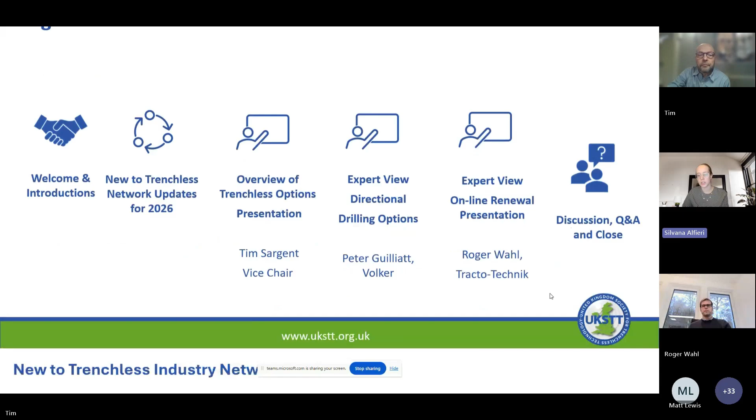I'm not sure if this is anyone's first New to Trenchless experience, but if you came to any events in 2025, you saw we were pretty busy. We had 5 online webinars like this one in 2025, covering an introduction to the network, new installation, rehab, investigation and assessment, and the benefits of trenchless. We had those throughout the year with great experts and engagement.

Another aspect of what we did in 2025, and will continue in 2026, was in-person events, often tied in with a No-Dig roadshow or other UKSTT event. There was a visit to Wessex Water to learn about some of their programs, a visit with No-Dig Live in Sheffield to Pipebots and the University of Sheffield to learn about the underground infrastructure facility there, and at the annual conference and No-Dig roadshows we had more in-person networking. Thank you if you came to any in-person events, it was great to meet people in person and online.

We had over 125 participants in our events last year from over 70 different organizations across the trenchless space, which was really exciting to see. We did a bit of a survey to see what was working and what wasn't, and got some really good feedback on these sessions.

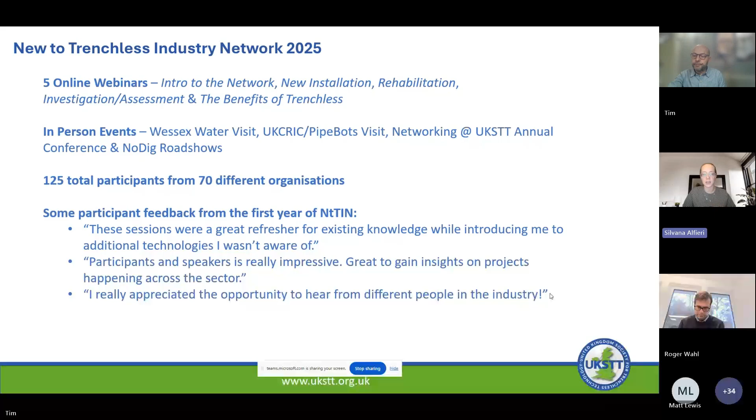Hopefully we can continue some of that exciting work that we did in 2025 into 2026. On the next slide is what we've got planned for 2026. There's a lot on here, but some of it is directly related to the network. Others are associated events, but we're going to shout it all out anyways.

This is the first of the online webinars, and we are planning 4 more throughout the year. You probably already have the dates, but if not, a reminder. On March 26th, we'll be on rehabilitation with a focus on non-CIPP methods, because the one we did last year was more focused on CIPP. On May 14th, we're doing site investigation and condition assessment. July 16th will be focused on infiltration, and November 19th will be rehabilitation with a focus on CIPP.

Those will all be at this time slot, 2 to 4 on Teams, and we'll circulate the meeting links beforehand. It'll be a similar structure to this one - an overview and then expert presentations on their experiences with those technologies.

Some other associated events, which will be great if you're looking to learn more about trenchless and how we interact with other industries, are these 3 associated events. On January 28th, there's an IWA ISTT webinar on an introduction to trenchless, so that will be a bit of a collaboration. I believe if you'd like that link, you can contact admin at UKSTT. I don't know what time that will be at, apologies, but that will be a good webinar.

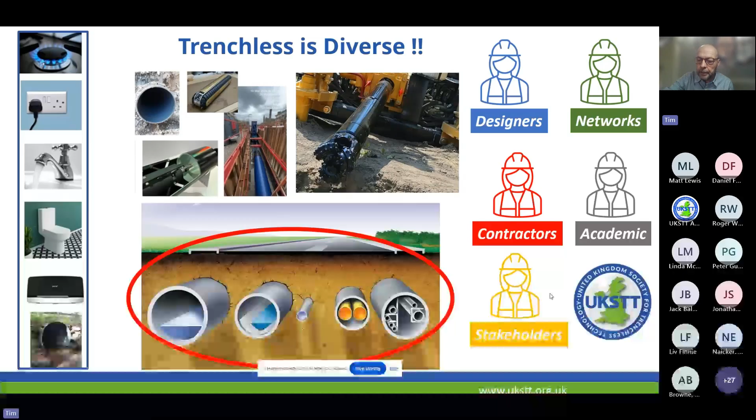We need to recognise as a community the diverse range of people involved, whether on the design side, the owners of the networks, the contractors, specialists, even academics now with the brilliant work going on using AI, and stakeholders such as highway authorities and the Environment Agency and other agencies, wherever you are in the world, who have an influence but may not be the paymasters. We can learn from each other, from other sectors, and the whole industry as a whole.

Next, why bother? Traditionally trenchless came from a background of not digging the road up. That's still valid, and we continue to reduce reinstatement and excavations in the road, but there are other huge benefits. One is time. Some programs are quite significant, and the productivity these techniques offer the industry exceeds anything you could achieve with a traditional trenching operation.

In my early days I did a lot of directional drilling projects, and I would invite clients, when it was all new and exciting, to come visit the job, and warn them to come early. Some wouldn't take that advice and came late in the day, by which time the project was already completed. So productivity is an area to look at.

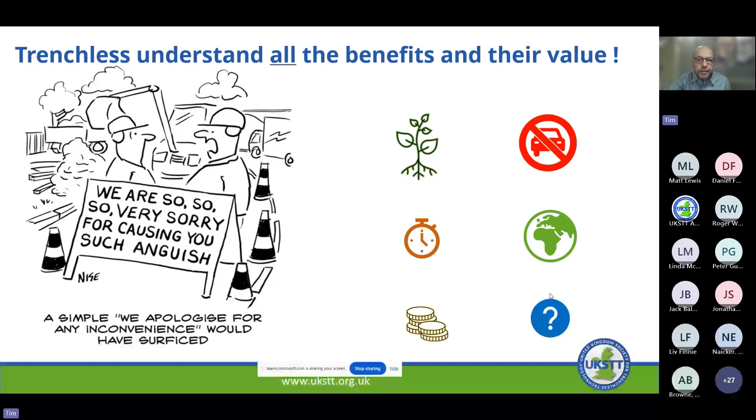The other thing to look at is programs. Projects undertaken by trenching can take significant time overall. With trenchless there may still be disruption because of access, stringing out pipe and other things. However, a program in London that was going to take 3 years was cut down to 9 months by using trenchless. Just a small point, but something we like to raise and educate people about.

The other thing I want to mention is: is it innovation, or is it business as usual? We have this dilemma where we talk about things being innovative and then frighten people away. I don't know how many on this call are really new to trenchless, but often by calling it innovative we scare people because they don't want to be the first to use it. Most of the technology I'm going to show you has been around for 40 years plus.

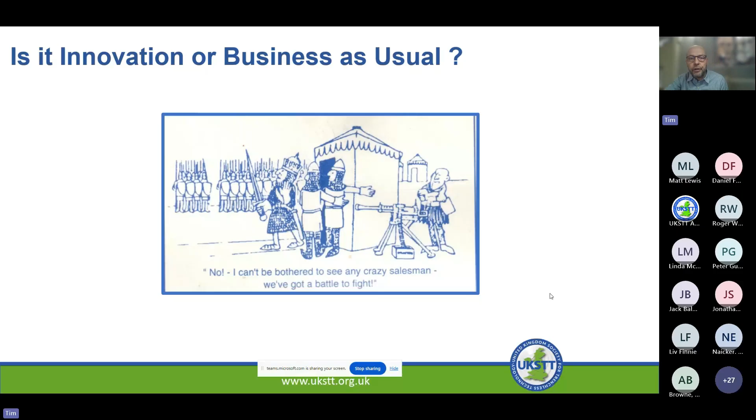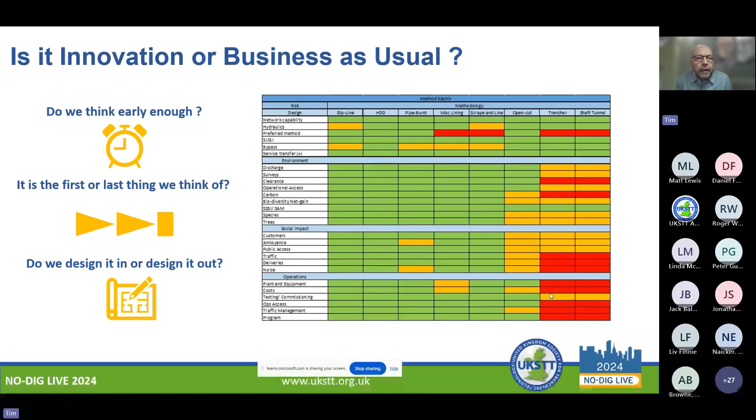So don't be too scared, it's about knowing which technique is appropriate and which process offers the best outcome. We often hear: we would have loved to use it, but it was too late, we'd already committed. We'd encourage you to think about it from the very first moment and engage really early. This crib sheet I've borrowed from Severn Trent Water encourages their design engineers to consider all these things before even thinking of putting a trench down the road or through a field. Thinking early and engaging early is really important.

This slide scares me. This is a project I was doing in 1990, and I have to pinch myself, that was 36 years ago. This was the M40 motorway in the UK, which hadn't been used yet. They'd built it and left out quite a lot of communication ducts, which wasn't helpful. So we went and installed those ducts by trenchless, while the tarmac was still very green and had never been used.

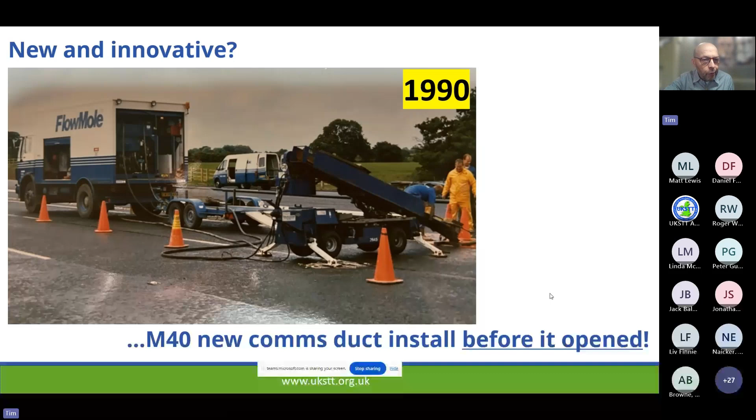So I'm going to run through a snapshot of different techniques, whistling through those now to give you a flavour. Some of which you guys will be even more familiar with than me, I'm sure.

But my job is really to inform you and educate you about the options. One health warning, particularly with new installations, is absolutely critical.

Going back to my first point, it's well worth noting ground conditions. Ground conditions can be a huge challenge if you haven't got the data. It's not that you can't use these techniques I'm going to go through, but knowing what the ground is can determine the type of technique you might adopt, and indeed the equipment, the tooling, or the cutting heads you might use to install the assets. So spending time understanding ground conditions is really important, and it will pay an absolute dividend.

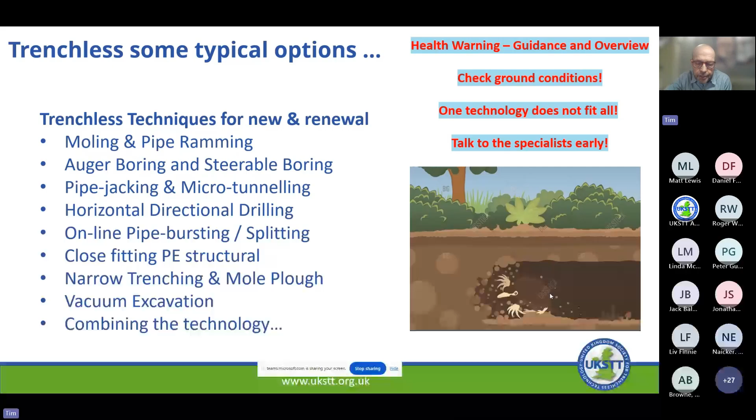Where we have failings in the industry, it's often down to lack of information and knowledge. But that data is really invaluable, so I'd call out to you guys to consider that on your projects. The cost of getting that information is minute compared with the huge benefits you'll gain by having it to hand.

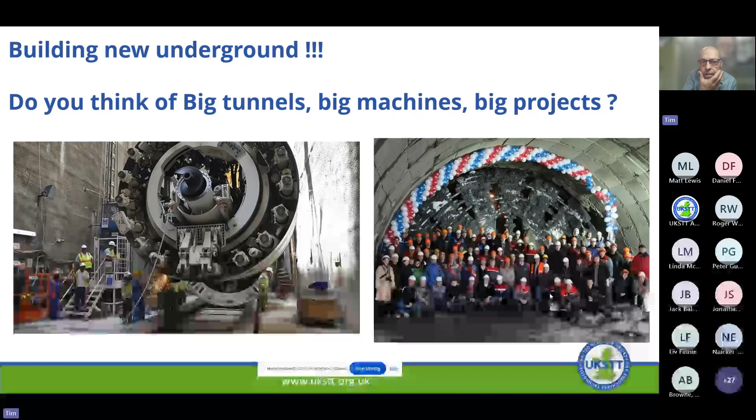So now I'll go into some details. Often when we think about building stuff underground, I'm a civil engineer by trade, and I think of these things as often defaulting to the mega projects - big tunnels, big machines, big projects. That's probably why people don't adopt trenchless on occasion, because that's what they're thinking.

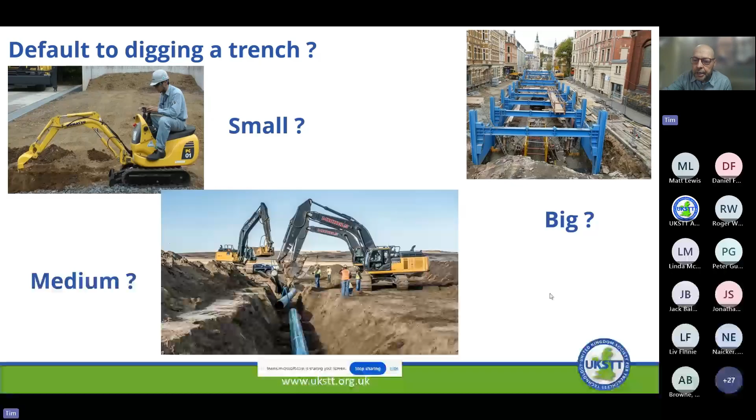So I'll touch on each one of these briefly. Starting small - moling. I know Roger's on the line from Tracto, but whether it was Russian or German invention, this goes back many years, I think 50 or 60 years ago. It's the most simple technique for moling underneath the ground.

Ironically, when we talk to people, we still see people cutting trenches across roads, whether it be a small road on a golf course or a major highway, for quite small pipes, and it really isn't needed. So moling is your simplest way of avoiding digging that trench. Roger and Tracto could bore you to death with that history, but it's important to recognize that even on the smallest diameter, on shorter lengths, you can use this technology.

What I'd ask people to do in the chat is, at the end of each one of these, if you've got any questions about the tech, drop a note in there. So that's the starting point.

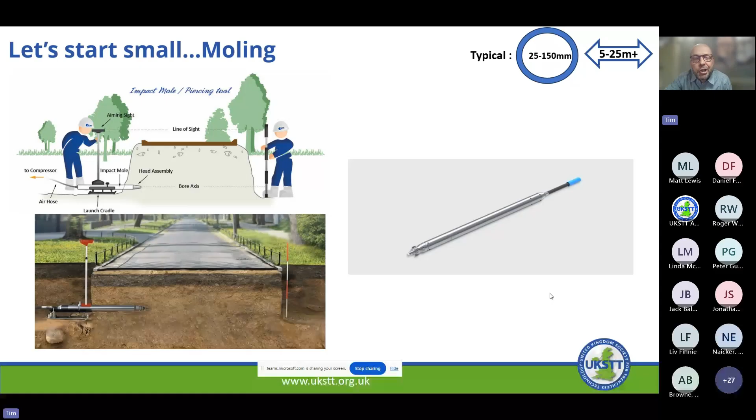Then using a similar process with a percussive hammer type technology, we can step up. Often people have forgotten about pipe ramming as a very simple process to install a crossing without digging a trench. These systems can cope with a very large range of diameters. Why bother doing this? Well, if you've got the space, you can adopt this technology, and it's relatively cheap compared with some technology I may show you later. It can be very effective.

At the end of the day, you're only displacing the sleeve diameter, not the full volume of earth. Once you've taken your sleeve through, you can remove the earth, and you've effectively created a sleeve through which you can pass a conduit. This can be used for anything - we're talking about creating a conduit, so you can put a cable in it, a pipe in it, it's been used for things like district heating, and for fiber.

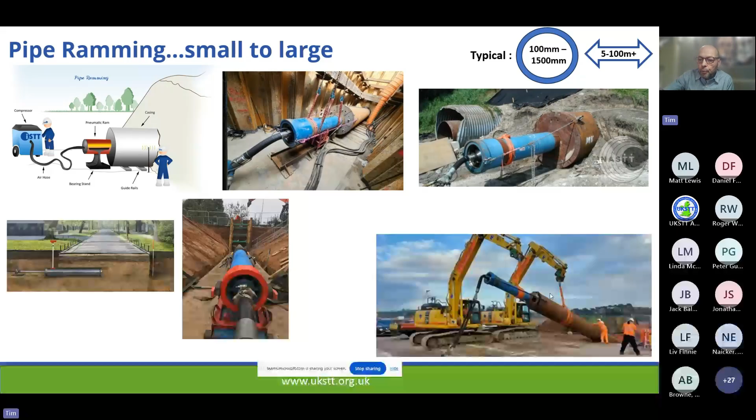Now we're just going to keep moving up levels, really. And again, I don't apologize for going through each one for those who aren't familiar. Auger boring. When I started my career, tunneling kit was extremely expensive. The costs have come down now. Drilling was really - directional drilling, which I'll touch on in a moment - was in its infancy. There was an awful lot of auger boring done.

Again, very simple. We're starting to step up with diameters. We're starting to step up with a little bit more sophistication now, where you are using some sort of pilot, and there are a variety of pilot kind of systems that can be used, but you're using some form of pilot to be able to get through to where you want to, from the launch to the reception.

Once you've done all that, you've got your casing through to your reception area, you're then going to pull back your sleeve. Now you can either pull a sleeve back, or you can actually pull your product pipe or your duct in with the augers, or in the instance of the bottom, if you want a larger diameter, you might even auger in reverse, if that makes sense. So a very simple process, but very effective for shorter punches, going up to some quite reasonable diameters.

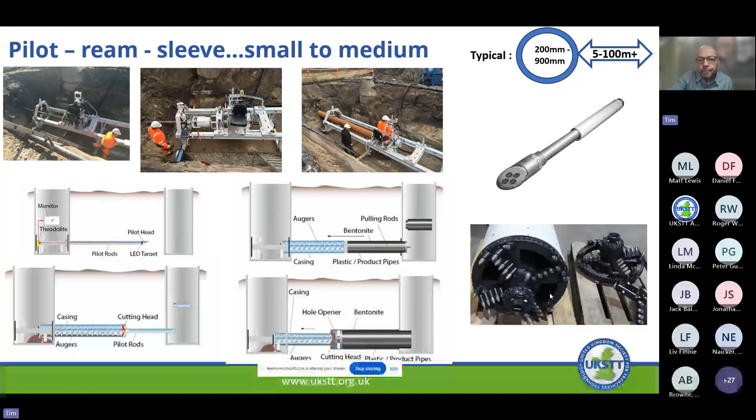So if I show you another slide, we're now sort of moving up another level, and you can see different ground being coped with there, a steerable drilling head, a much more compact unit there. So again, consideration of a location where they've got a soft rock situation - they're able to cope with that, and they're able to cope with that because they can use a different approach through that.

You can see where the guys are stood, which gives you an idea of the scale. That's a useful picture, because although the guy's smoking his fag and it doesn't look the safest environment in the world, it does really demonstrate the sort of diameter we're talking about.

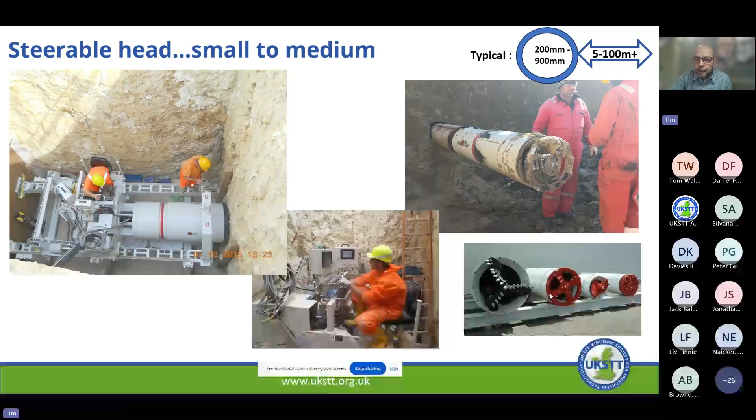You don't have to be talking about really big tunnel equipment. This is at the small end, but extremely useful for the right sort of project to get a conduit through and to put your utility within that conduit. This is just to give you a flavor, variations on the same theme. People have adapted the equipment to be able to...

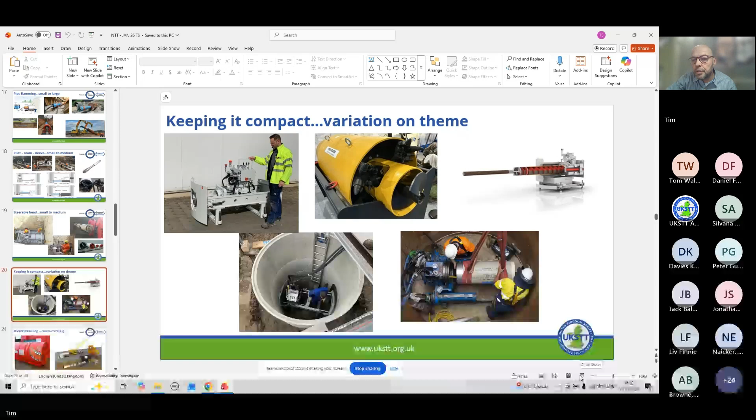Sorry, I've lost the pictures. Oh, have you? Has that gone through? No, you lost it. I can still see it. Me too, I've lost them all. I've still got them, mate. Shall I relaunch it? What's the best thing to do? Do you want me to read? Did it just drop out just then? It hasn't dropped out for me. No, for me, I've still got them. Let me go back. Whoever's lost, do you want to reconnect? Maybe it's the connection that's gone down. Hello? Hello, have I lost you? I think people are coming back in. Some people are coming back in. Oh okay, that's better now. Can you still see it? Yeah, I can now. Okay, cool.

Not quite sure what's happened with the connection there.

So just following on again with augering and that type of technology, you can see here where the first few photographs were showing quite a large excavation. Somebody's been quite generous - another one which you could question in terms of whether that's rock or open excavation. But these systems can be adapted for putting in effectively concrete rings or shields, and you can see some clever ways of getting them into the excavation, into a launch and reception using that type of arrangement. The other thing I've talked about - you can see they just use a steel sleeve.

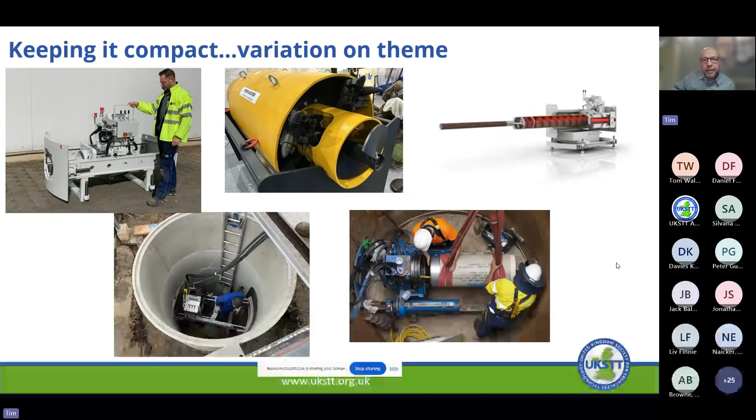If you look at the bottom right hand corner, you can see where they've been doing some augering and jacking in a clay pipe directly, and that will become the product pipe, the gravity pipe. So there's a huge variety of these and a huge variety of ground that they can cope with. And again, that's why this information up front is absolutely vital to understand their adoption.

Okay, so when we've gone from those, I'm trying to step this up really in gentle steps. All these things are determined by the complexity of the project. But what I wanted to do was really make sure people could understand that there are choices before you get into this type of tunneling operation.

This tunneling kit is Japanese, developed in the 70s and 80s because there was an extensive need to install a wastewater network in Japan. Japan hadn't got the main sewer network infrastructure that we've enjoyed. It's one of the most highly populated countries in the world, and if anybody's been there, it really is. So they had urban environments where they literally just could not consider trenching.

So microtunneling in this format with the Iseki Unclemole was developed for a huge variety of ground conditions, and these systems have proven to be very successful and applied all around the world. But we are talking now about moving up another level, though not those really big machines I showed you at the start. This is still in the microtunneling territory, but can cope with a wide variety of ground, including some quite poor ground conditions. We might tend to default and think of this being used for wastewater networks, but there's no reason why these systems can't be used to create conduits for other utilities.

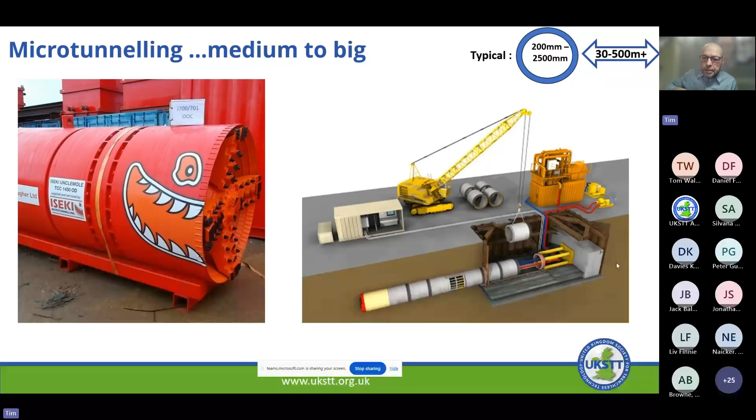And then we start going into almost an adaptation of a theme here. What's interesting - and we'll go into directional drilling in a minute - is that with the advent and proliferation of directional drilling and the success it's had, the tunneling manufacturers have responded by adapting their tunneling equipment to do curved drill runs, to put pipes in directly behind. Often these relate to transmission networks such as gas transmission or large diameter water mains. So it's a combining of technologies now - we're seeing the pushing of the pipe in behind the machine being capable of coping with that, and being used on quite extensive projects.

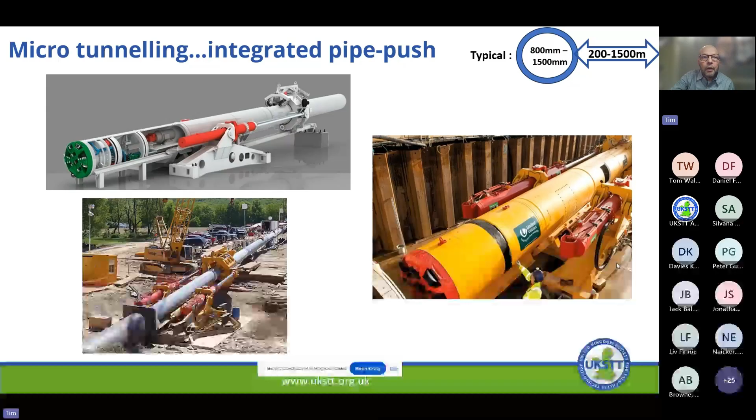What we're also seeing is people adapting the technology, which, if you looked at this 40 or 50 years ago, you frankly wouldn't have used this sort of complexity of equipment for these types of jobs.

But particularly in mainland Europe, in Germany as an example, where they've shut down nuclear and shifted where the power comes from - wind farms and various things across the continent - there are significant lengths, hundreds of kilometers, of electricity transmission lines being installed. Because of that, they have adapted these tunneling type machines and micro tunneling for use in that market, which myself, I would have thought wouldn't be appropriate.

But you can see here, this is work taking place. The trick here, the benefit, is they are doing bores of 2 kilometers in one shot. So you've got a big setup - you can see the photograph there, the setup on this particular job. You can argue that's a hell of a setup for such a small diameter boring operation, but the whole point here is they are going to run that machine for a significant distance. And that's where the advantage comes in.

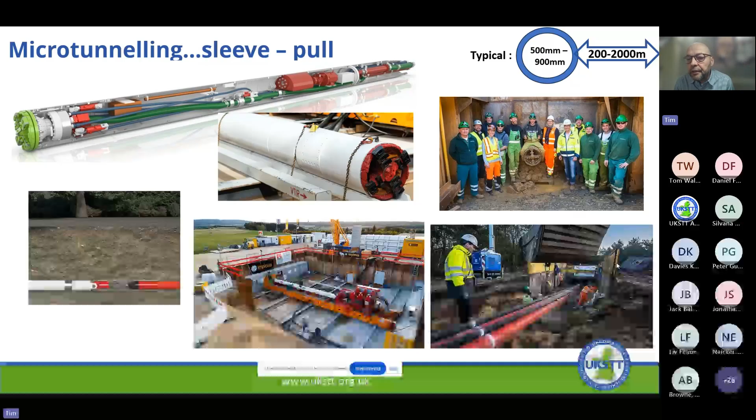So you can see the launch pit there, quite significant. You can see the reception at the other end, but in between, there is no trench.

Now I'm going to move on to another bit of tech that's used quite extensively, which is directional drilling.

Peter from Volker is on the line. Peter, I sat in his car somewhere - where are you, Peter? Up in Sellafield, was it? Yeah, I'm in Suffolk, around the Suffolk area, sitting in a co-op car park somewhere where I've managed to find a signal for the telephone. Okay, and you're not going to move.

So what I'm going to do is introduce the drilling, and then Pete will chip in as we go. I think the key here, as you reflect, for those that are new to the technology, a lot of these new install techniques like tunneling tend to be a single drive. With some of the other technology, you're putting a pilot through, and then you're making sure your pilot goes where you want it to be before you commit to installing the actual carrier pipe or a sleeve. Again, this is an educational piece, so no apology here for those who are very familiar with this.

On the left-hand side, you've got the pilot type of operation. So you can drill through with a small pilot - that could be anything from 2-inch to 6-inch diameter. That will have various sensors on it, depending on the depth and depending on the diameter. I'll show you some of the variety of drill rigs in a minute.

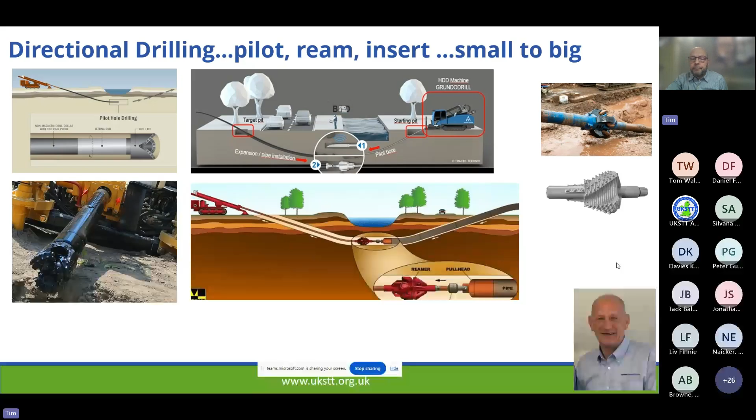So even at that end of the scale - us lot in our society get twitchy when people are cutting trenches across tarmac or playgrounds or whatever it might be, when actually you can do it remotely and very easily by having the right equipment. Exactly the same principle - get your pilot through and pull back your conduit.

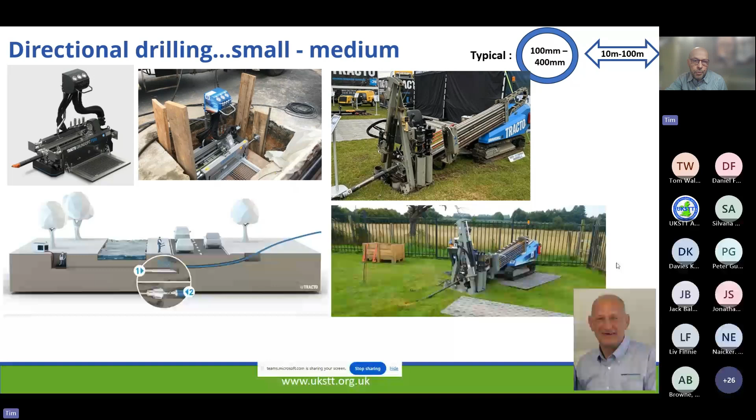It comes in on rubber tracks, put in position. As you can see, they didn't even bother with a launch excavation there because it didn't need it, since it was only a service pipe. So same principle: drill through, pop it out the other side, pull in your service pipe, and get away from the job. In some of the early projects I was involved with promoting this stuff, we were embarrassingly quick on those types of operation. So be aware of it, understand you can use it for some quite clever stuff, and the kudos of not disrupting at all is huge.

If we move up a little bit, you can scale this equipment, and that's the important message here. So we're now scaling up, and we can deal with bigger diameters and longer lengths. But what I wanted to draw your attention to on these photographs are the top left and the bottom right. There's some irony here with these two photographs.

This rig is being used to install water mains down a road, partly in the road, partly through the verge. They're drilling probably 100-meter pulls at a time, installing probably a 125 or a 180. The irony here is they were instructed by the Highways Authority to cordon off the area of work in which the mains were being replaced. You can see the irony: they've used the place to put the tanker and the drilling rig behind it, but actually they could just cordon off that bit. They didn't need to cordon off the whole length. So it's quite interesting how a lack of understanding from the local authority insisted that since we're replacing the water main, they want the section you're working on technically coned off. But you could perfectly legitimately do this job otherwise.

We've shown crossings like the glamorous engineering problems - the railways, the canals, the rivers - but you can also drill horizontally down a road, down a lane, get it down to depth and install a water main, a duct, fiber, whatever it might be, and drill horizontally. You simply go into your reception pit, level off at the position you want, then drill horizontally and pop out at the other end. You don't need to be doing curved runs or those sorts of things.

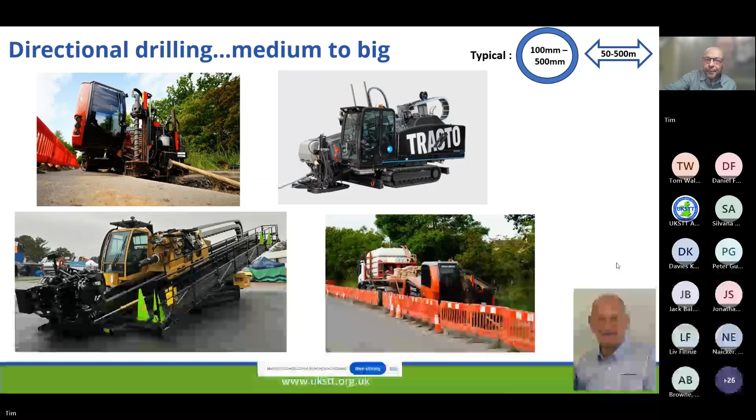Okay, so now move on to often what people think of. Well, I say often that there is this extreme where these are the big engineering projects. They are significantly complex, they can go into very large diameters. I put 1.5 meter diameter.

Maybe you can go even bigger these days, Peter. I don't know. Yeah, 56-inch one is more or less 1.5 meters. We've just done about a kilometre of 56-inch in Holland, which in an unstable formation, you're having to cut a hole 1.8 meters and stabilize it for 1,000 meters in order to pull the product piping, which is very technically challenging.

Yeah, and I think the capabilities are there. The interesting thing is if you go through each one of those scales of drilling rig, you can see that it becomes more complex, but the benefits are still there. So the very small rigs might be able to drill up to say 100 meters, then the MIDI rigs can do up to 500 meters. When you get up to this scale, in single drill runs, this is one of the big advantages of this particular technology compared with some of the tunneling technology because of the distances. These become significant.

1.5, I mean I've got 4 kilometers as one that I picked up on with some of these rigs, but significant lengths and scale, which is not often understood.

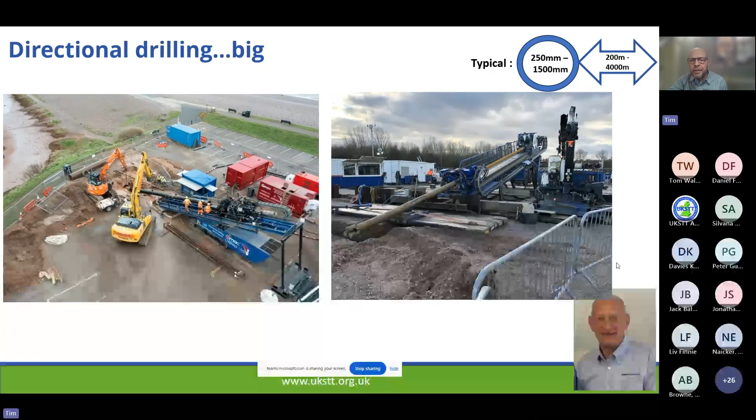Let me turn this into a bit of reality. Peter, could you give a flavour, with your expertise, to the audience about a couple of these bigger engineering jobs?

The one on the left is actually one of our projects, in Scotland. The picture doesn't do it justice — the rig is sitting 85 meters above sea level at that point. We were drilling down a severe slope and out onto the seabed where you can see the barge, which was our exit point onto the estuary bed. Very challenging ground formations, fractured rock all the way, and gravels on the seabed. It was a very challenging project, but successfully installed.

What was that for, Pete, so people can understand? That's for electric connection — the cable was then ploughed across to the peninsula. You can see at the bottom of the picture from the circle over to the land where they ploughed a cable in. It was to connect the two islands with electricity. There were 2 ducts installed for that, I think 400 mil internal diameter ducts. Good project.

Technically challenging again. The other one, I'm not sure what that was — it's an estuary crossing I think, 520 meters, I'm not sure if it went out to include the landfall, it doesn't look like it did. It just looked like an estuary crossing. It wasn't one of our projects, but the top right picture shows a product pipe about to be pulled in. I don't know what project that was either, but that's the drill pipe and the reamer connected to the product pipe.

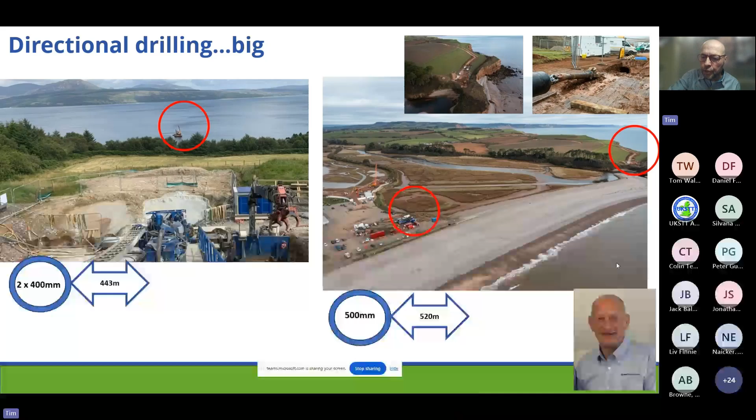Okay, appreciate that, Pete, thank you. No problem. What I'll do now is we've got Roger, who's joined us, which is great.

Roger's going to go into more detail about this, some slides about online renewal. We thought this was important because often technology or new installation is used to replace an existing asset, but we also want to draw attention to the fact that if it's possible, that asset could be replaced online and effectively renewed with a new asset put in place. So you're not reconditioning it, you're literally getting rid of that asset and putting in a brand new pipe, or duct - indeed, you could have put in a duct with this.

So I'm going to give an overview, quick slides, and then Roger at the end will give you about 10 minutes on pipe bursting per se, because we feel this technology, 40 years plus old, has been lost over the annals of time. I'll make mistakes now, Roger, and you can correct them in your bit. In principle, there's a whole range of diameters - we've even seen people use mini rigs to do this, though in reality you don't need to, there's plenty of good hydraulic equipment better suited to it. But there are different ways to replace online, so I'll give you a couple of quick examples.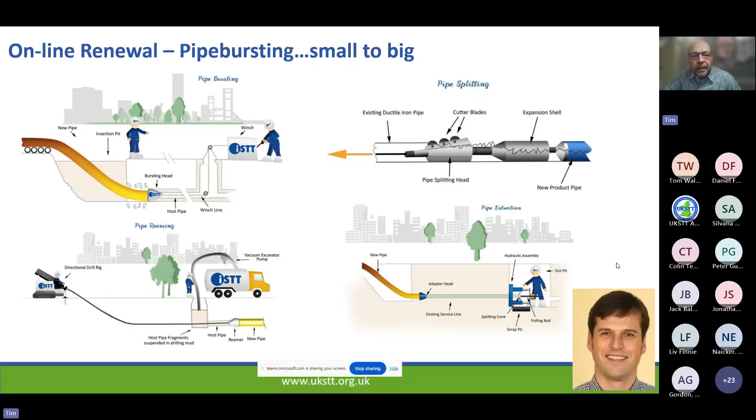Whether we call this pipe bursting or pipe extraction, I don't really mind, because it's the same principle. This is a way of extracting services - it was developed for lead renewal, but it doesn't have to be lead, it can be any small diameter conduit, because this is very clever. What it does is you take a cable through the original, attach it to the original, and as you pull the original service lead out, you pull in your new service. Very clever, very effective.

Clearly, you've got to have operators who know what they're doing in this environment. There's a lot of hydraulics going on here, and you need to be safe in that environment. But this has been used successfully and extensively.

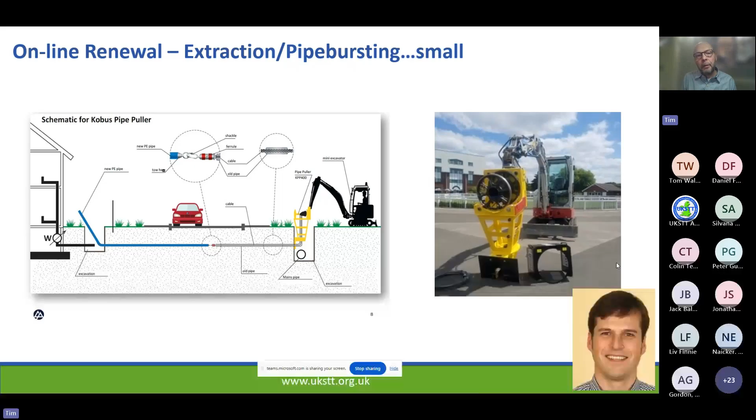So it's a really simple way of withdrawing an existing service pipe, gas or water typically, but renewing it by using this pull-through or extraction type of process. I won't do too much detail on this, as Roger will be talking to us in a minute. If we now look at pipe bursting,

we call it pipe bursting, pipe splitting, various bits of terminology, but it's all the same stuff. What I wanted to draw your attention to here is the left-hand side and the right. A lot of people, if they consider it, and it goes back a long time, think of pipe bursting as a methodology.

British Gas, as was Northwest, patented it with a company called Ryans back in the 80s, and it was used extensively to replace the gas network in the UK, extensively. So when people are nervous about it, thinking this is so new and innovative, no way would I ever do that - I'm talking hundreds of kilometers that were replaced using this technology.

So that does tend to make people think about small diameter. It does tend to make people think about cast iron pipes, because they're brittle and so they burst fairly easily. But that's fine - 4-inch, 6-inch, extensively used.

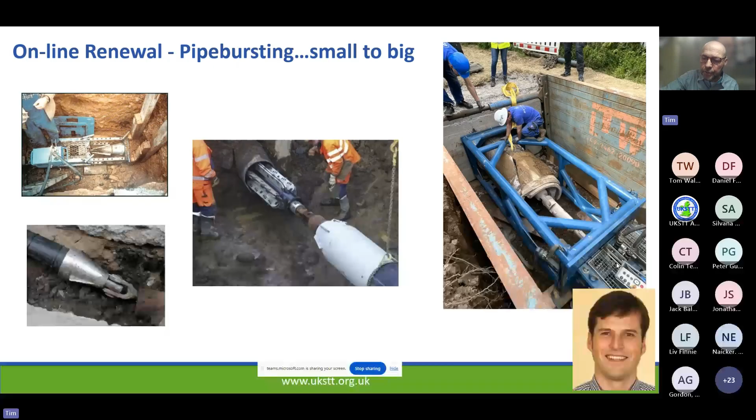You can obviously just pull in a duct, and then thread a pipe through if you want. But most of the time, people put the product pipe directly behind the bursting head. Just a nod to renewal, new stuff.

The simplest way of actually doing it is to slip line - that's just putting a plastic pipe inside a pipe. But of course, you lose quite a lot of the diameter. Again, these technologies went back a long time ago, where people said, well, okay, how do I mitigate that loss of diameter if I'm slip lining, if I'm simply installing a pressure pipe inside another pipe?

Well, there's lots of technology around to reduce the diameter of that pipe, pull it through, and then allow it to expand back. So you get what we would call a close fit or tight fit. And because of that, and because of the coefficient of friction of the plastic compared with maybe an old cast iron pipe - and you've removed all the iron nodules through cleaning before you do this operation - the hydraulics can be the same as the original, because you've got a much better pipe that you've put in, a modern polyethylene pipe, which is very robust. And then the other thing people say is, well, you couldn't use it in an urban environment.

Just wanted to show you this - this is Thames Water doing a project in London, a highly urbanized area.

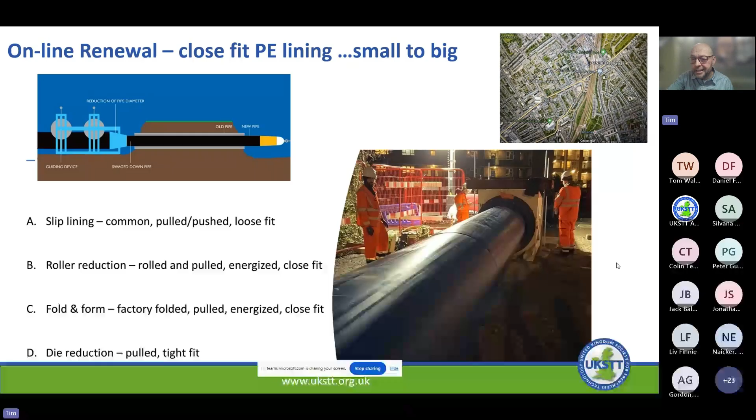Would have been too complex for drilling, too difficult, too expensive for tunneling. So this was another alternative that was adopted, and I think is in phase 4 with Thames Water at the moment.

And then I pause. I'm just going to show you very quickly just 1 or 2 other things. We're just after 3 o'clock, so I'm just going to pause slightly and just show you some quick other things.

Very simple, very straightforward, very effective in that sort of environment - fields, agricultural land and other things. So really simple way of doing a job that otherwise could have been quite disruptive. Really primarily used for anything that's cable orientated, so fibre and electric cable, but can clearly be used for smaller diameter polyethylene based pressure pipes because of that flexibility.

But the rigs will change, vary. Obviously not so easy if you're going to start putting in bits of pipe, because your reel becomes quite complicated and difficult, and rigidity of the pipe becomes a problem. So cables particularly are used with this sort of fairly simple technology.

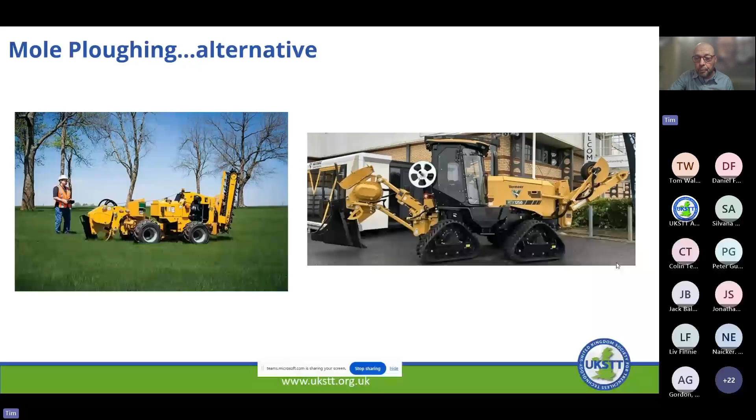We're not quite trenchless, but we're doing pretty well - don't want to go into detail, but similar concept: if you are going to trench, do it narrow. These systems, though, are cutting through everything, so real big warning here. Can be very effective, can be hugely productive, but you really need to know what's in front of you with these types of systems. If you think about drilling or bursting, even those, you're going underneath things that cross over you, but these are literally cutting a trench, so you have to be very careful. But they have been used very successfully on the right sort of projects.

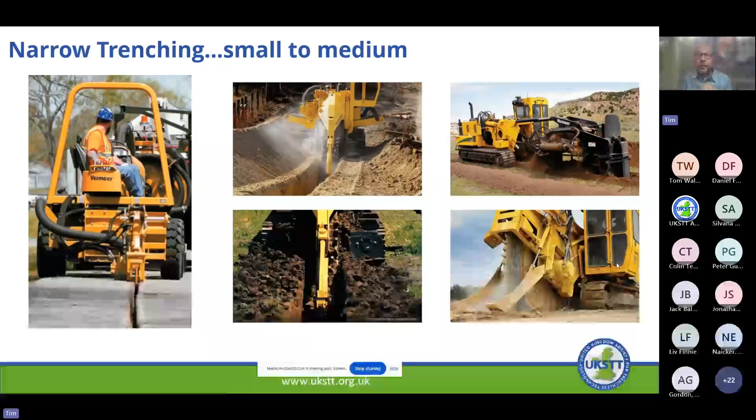And then finally, to wrap up this section, I did want to give a little nod to vacuum excavation for those who aren't familiar with it. Again, we can shoot ourselves in the foot by calling it really innovative - it is really simple. You are extracting by vacuum and using water or air to remove soil. Really, really useful for very congested areas, and often combined with some of the trenchless technology I've already talked about. So those that are really progressive in the market will use vacuum excavation at the launch and reception to really maximize the minimum excavation they can do.

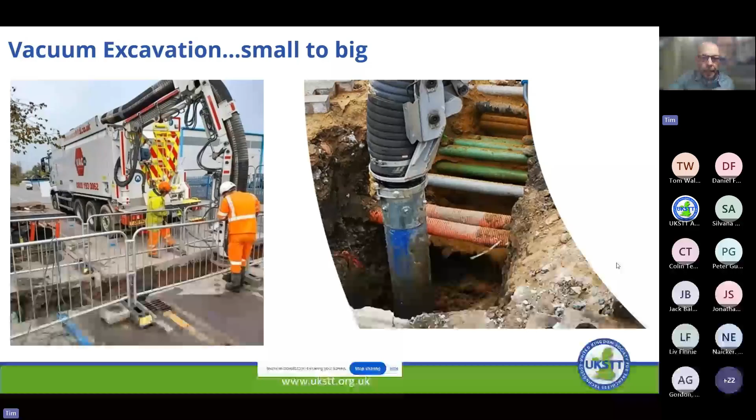So I just wanted to give you a flavour of that before I finally close, which you'll be relieved to hear. Just a nod to a number of people whose photographs and illustrations I've pinched from across the market, just to give you a sort of flavour. There are a lot of different companies out there with a lot of very clever kit that's available.

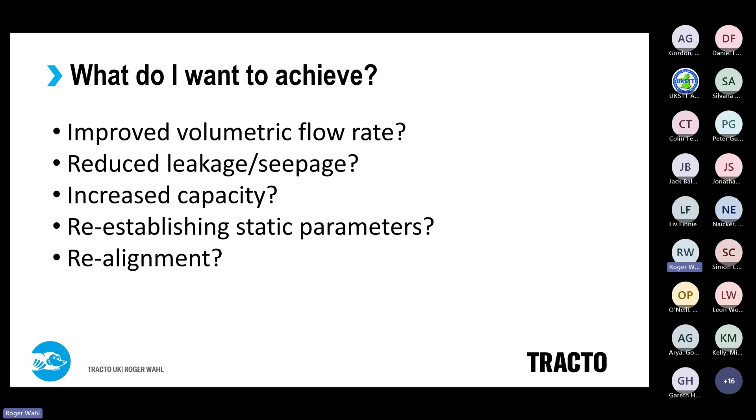I say could be, because it doesn't necessarily have to be. If you need to increase your capacity, and with that you need to increase your pipe size, pipe bursting is often the only alternative to trenching.

In other words, pipe bursting is nothing other than the application of brute force. We can pipe burst to install pipes with the same diameter or with a larger diameter, but we can also use it for simple pipe rehabilitation and in the NoDig pipe or relining technique. It can be done with a pipe burster, but it's not always the most economic way. So generally we concentrate on larger or same diameter pipe replacements.

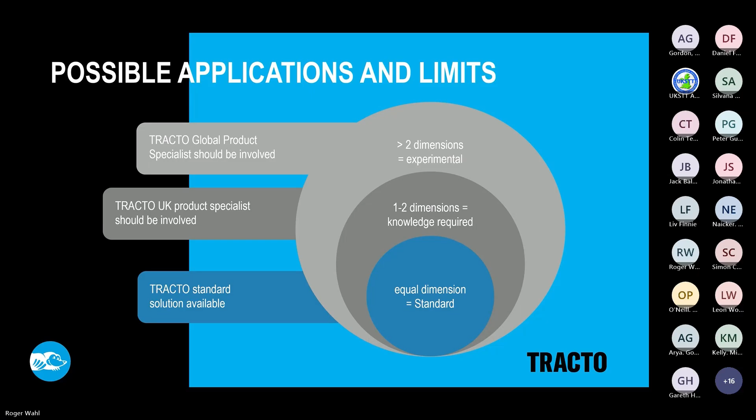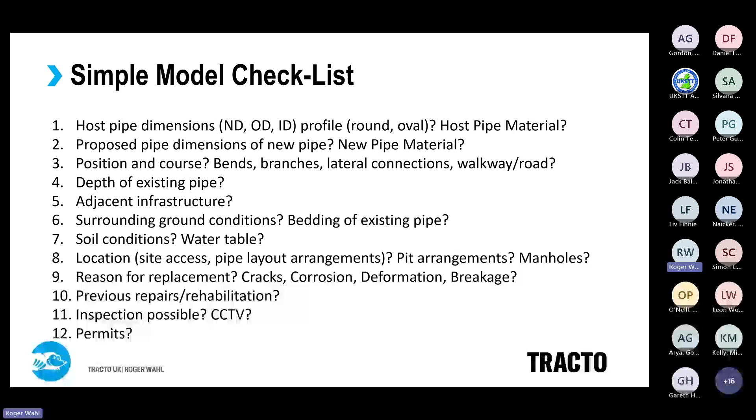And then comes the really important bit. You need to know how deep your pipe is, what other infrastructure is around it, and the surrounding ground conditions - the bedding material of the existing pipe, soil conditions, where the water table is. All of these are very important, because if you install a like-for-like pipe, with exactly the same inner and outer diameter, you still have to use an expander in front of the new pipe to break open the old pipe. That is around 30% bigger in diameter than the pipe you're installing, so you do have a little bit of ground displacement. Again, Tim was right in pointing out that sometimes the material can still be compacted, but as I said earlier, better safe than sorry.

Better safe than saying, oh, you didn't see what was in the ground. How could you do things trenchlessly?

So we have some simple rules of thumb. You can calculate the expected displacement of the soil, and you need to be 10 times that displacement away from the upper surface, and 5 times that displacement away from adjacent infrastructure. I won't bore you with the formula - we'll do that some other time when we go even more into depth on this.

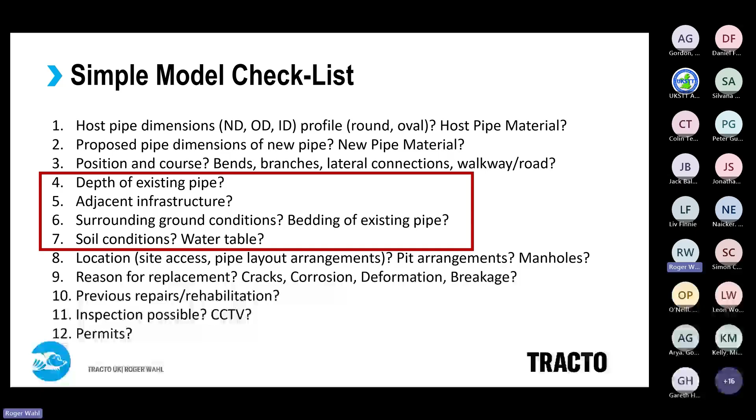So, safety first. You need to know the location where you're working for site access, reasons for the replacement - is it cracks, corrosion, deformation, breakage? All of this has got an influence on the type of tooling that you use. You must know whether there's been previous repairs and rehabilitation, whether you are likely to encounter repair clamps, for example. And if you can, it's always good to get a CCTV survey or some other inspection. Last but not least, make sure that you've got all your permits before you start the job.

I think it's fair to say that we at TRACTO have probably got the broadest range of pipe bursters on the market. You see here a lot of numbers, but it is really quite simple. As a rule of thumb, the number that you see here divided by 2 is the maximum diameter that you can install. So the 2500G, which is a 250-ton pipe burster, can go up to roughly 1.2 meters. And the smallest pipe that we can burst is 50 millimeters, a 2-inch pipe.

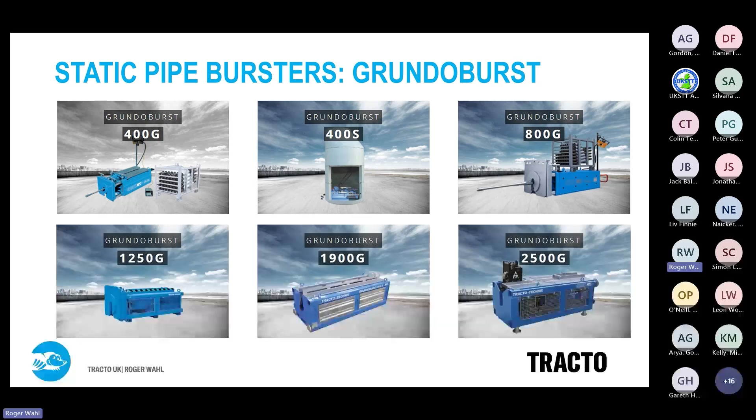Below that, there needs to be other ways because we've got to get some rods in there somehow. When it comes to the materials that we can pipe, it's fair to say that we can practically burst anything: stoneware, concrete, asbestos cement, reinforced concrete, cast iron, ductile, PE, PP, PVC, glass fiber reinforced, steel, and pipes that have already been lined.

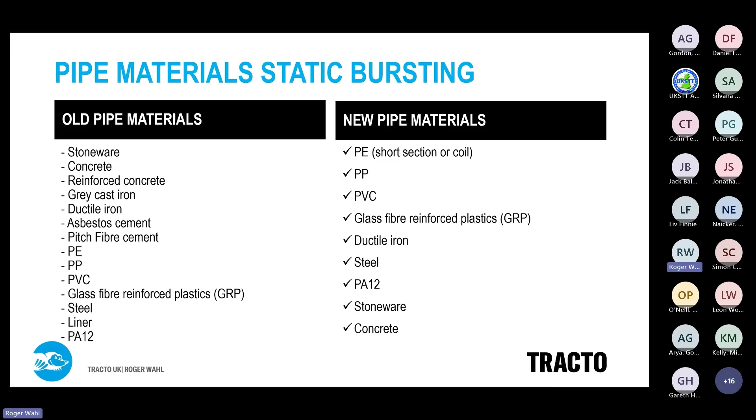When it comes to the materials that we can install, again, we can install round, oval, short section, or continuous coil. Obviously, when it comes to stoneware, you'll be hard pressed to find continuous coil, but you know what I mean - anything is possible. For everything, there's an appropriate accessory to achieve that. Nowadays, most times we just pull in PE pipe.

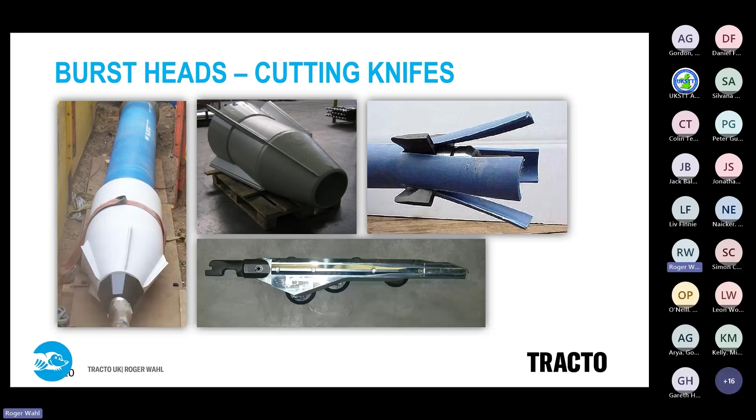There's a wide variety of tools. Some of them have been around for a long time - these expander heads and roller blades to cut open ductile material. Some others have only just recently appeared - this 4-blade cutter here is specifically designed to burst a PE pipe, and yes, we are starting to burst PE pipe that's come to the end of its service life. Some more impressions of different tools: double delta blades, single delta blades, and here a little impression on the sizes these can have.

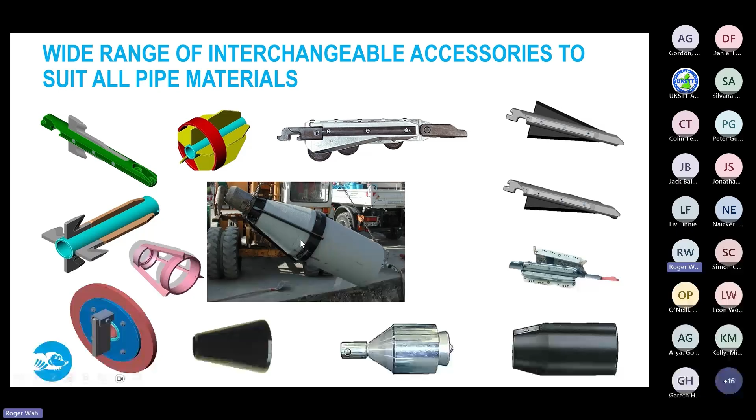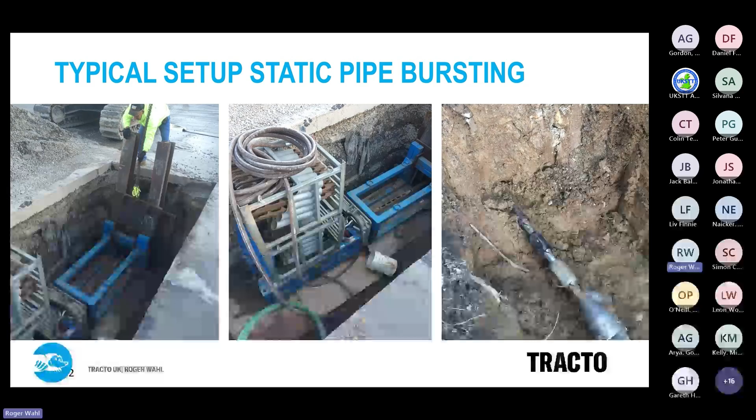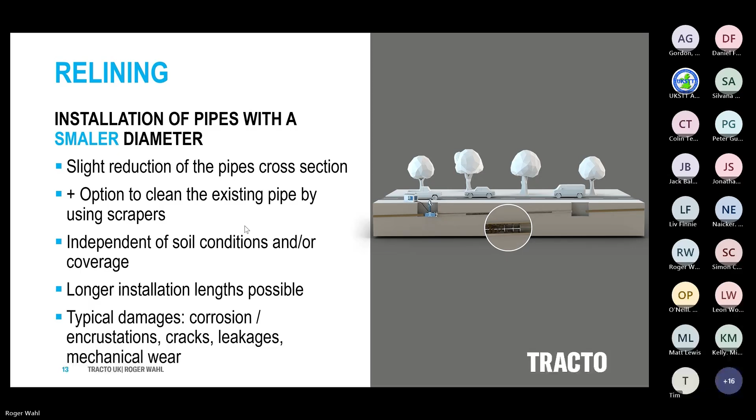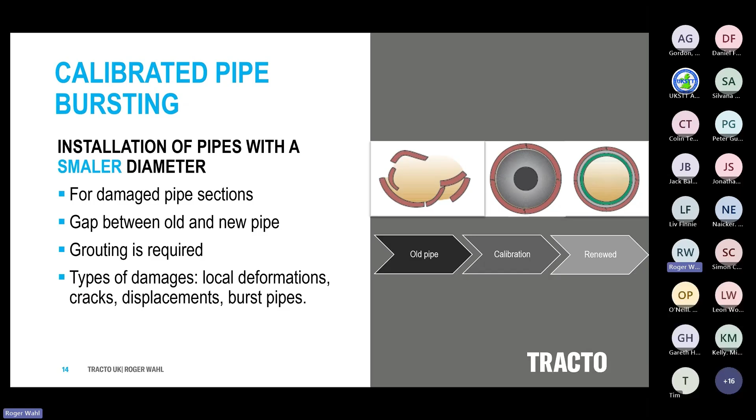So yes, just very, very briefly, other than breaking up the pipe, we can still do some rehabilitation. Here, I don't know whether you see this really well - we've got an attachment on the machine that scrapes out an existing pipe. Or we can do what we call calibrated pipe bursting, where we recalibrate the diameter of the pipe and then pull in a slightly smaller diameter pipe.

And that is something very topical at the moment, gaining loads of traction, certainly on the continent, but I'm sure it'll happen in the UK as well - the so-called tight in pipe, where new short section pipes are being pushed into an existing pipe, but often these pipes, if they have larger deformations, need to be re-rounded before the new pipe can be pushed in.

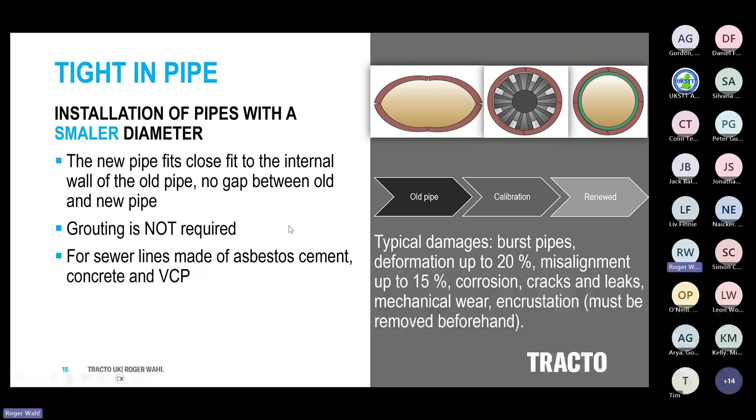Increasingly, people will, as part of quality control, want to know that during the installation process with pipe bursting or HDD drilling, you haven't overstretched the pipe that you've put in. There's a way of tensile force measuring and data logging. You can put one of these load cells between your pulling head and the rods, and with that measure the actual force on the pipe during the installation process, recording that along the distance of the installation, then get a printout to guarantee to your asset owner that the pipe was not pulled with a larger force than the specification allows.

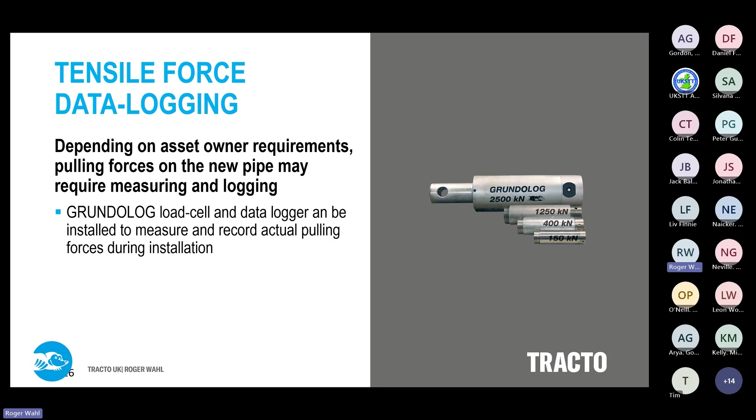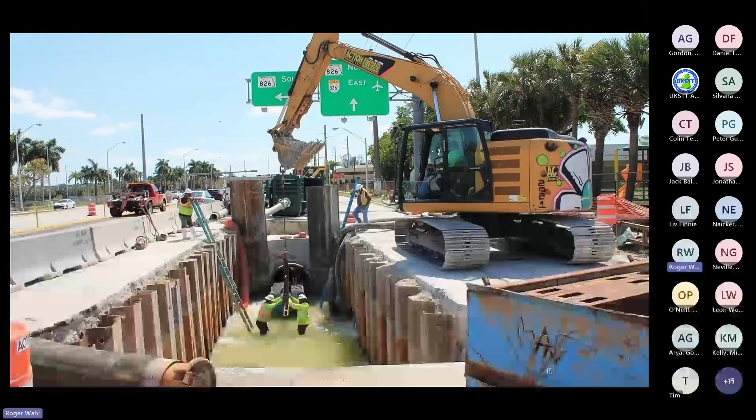So the machine is fairly robust and sturdy, and I hope that gave you a nice little insight into that one technique. We believe that the future of infrastructure renewal is trenchless.

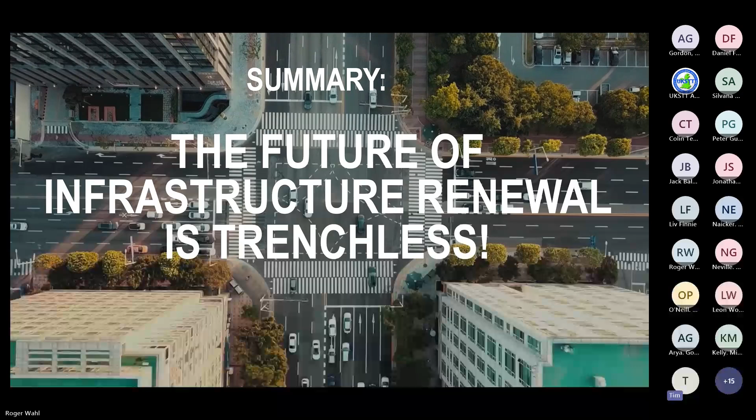In the chat, we've been asked, is there a risk of the new pipe being damaged by shards of the burst pipe, after the host pipe has been split open and cracked open? I would be lying if I said there was no remote risk, but to be honest, in the 10 years that I've been in trenchless, I haven't heard of this. I'm sure there could be some outside scratching, it is just normal when you go through that kind of environment, but the risk is very, very remote. I can add to that.

What's interesting is, many years ago when I started with pipe bursting, literally my first job was sent out to do a pipe bursting job in the Northwest. When that was first started and developed, what used to happen is that the pipe was sleeved. Originally, before there was a level of confidence with PE, and you have to remember this goes back over 40 years ago, they used to sleeve it, putting the hose pipe inside the sleeve. Bearing in mind its use, this is gas mains.

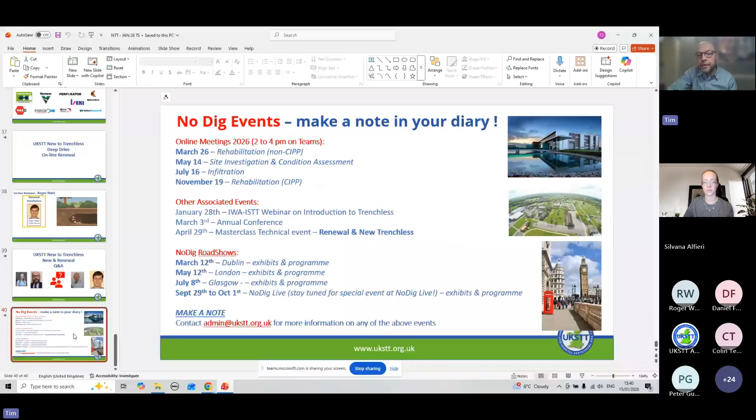We've tried to give a few examples as we've weaved through the technology. I really would implore you to have a look at these dates - there are loads of opportunities in 2026, and we've got a big program coming up. If you continue to work and are interested in the renewal and new stuff, we have a masterclass on the 29th of April where we'll have experts across the whole field we discussed today - microtunneling guys, drilling guys, bursting guys, all sorts in the room with you, for a one-day event.

If you've got projects coming up, this is really where you want to look technically - I'd ask you to consider that event, taking place in Leamington Spa. Is that right, Lynn? It is, yeah, at Leamington Spa in the UK, face to face. We've had these specialist events, and networking and talking to others is hugely powerful there.